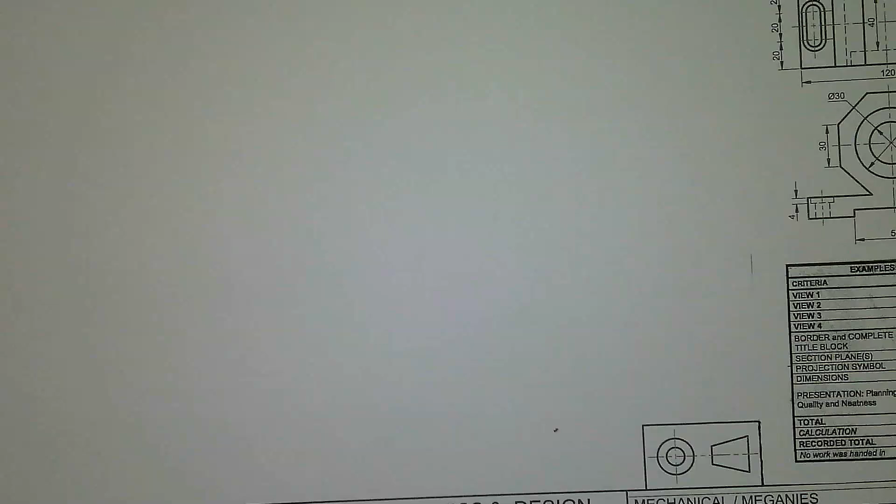Alright, great then. So today I'm going to take a look at a mechanical drawing in preparation for the upcoming exams. Now, if we have a look at this specific drawing, we are given the following. They tell us that the figure shows a front view and a top view, and it's in third angle orthographic projection.

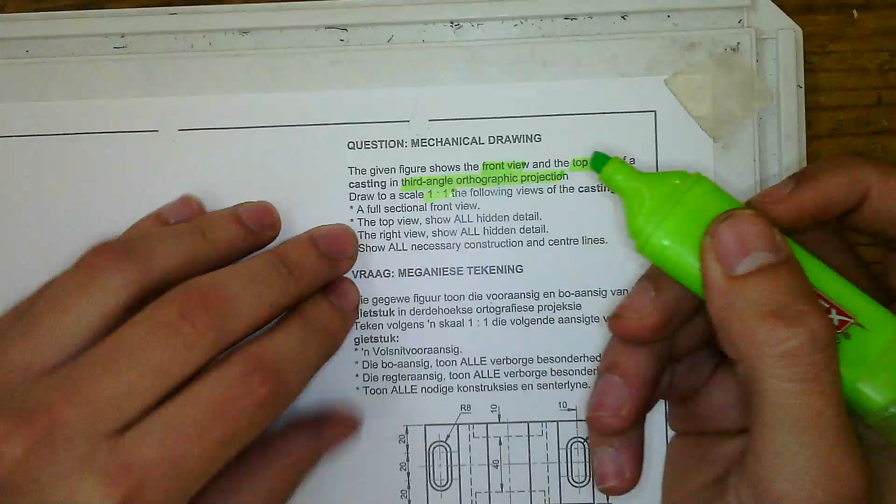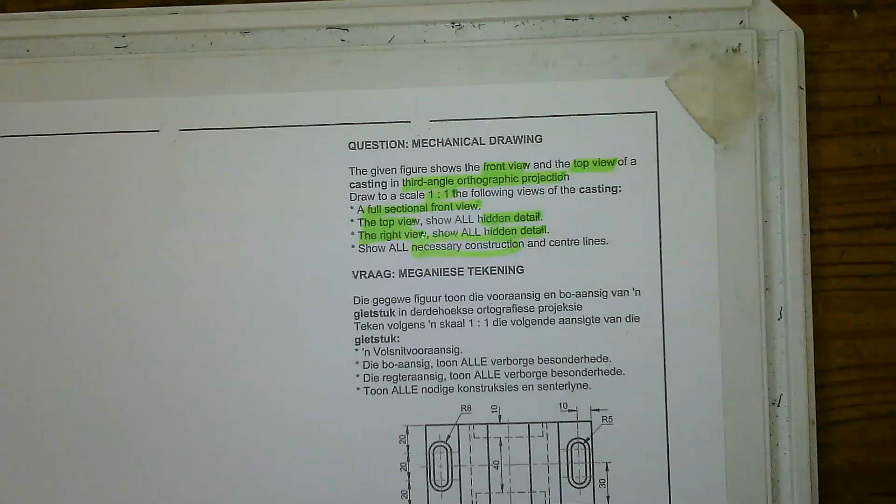And I want you to draw to the scale of 1 to 1 a full sectional front view, a top view with hidden detail, and a right view also with hidden detail. And you need to show all necessary construction and center lines. So if we look at the given views, the front view and the top view, we first need to figure out which one's which. And they told us that it's in third angle orthographic projection.

And in third angle orthographic projection, we know that the top view is always above the front view. So if the top view is above the front view in any third angle orthographic projection drawing, and they've given us a front view and a top view, then this has to be our top view and this has to be our front view.

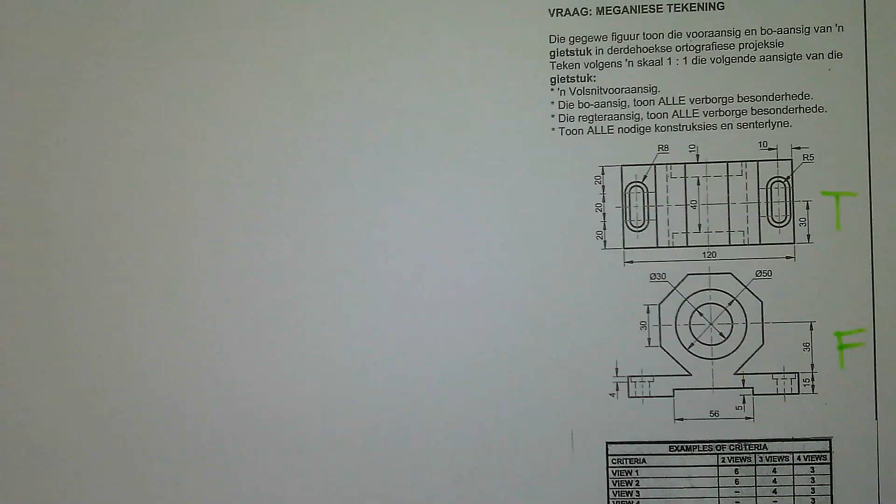Before we start drawing, I want you to please take note of the following. Before you take your pencil and just start drawing one of the views, you first need to calculate how much space you need for each drawing, since they have not given us a grid to work off. So if I look at these drawings, I can see that this one has a maximum width of 120 mils and a maximum length of 60.

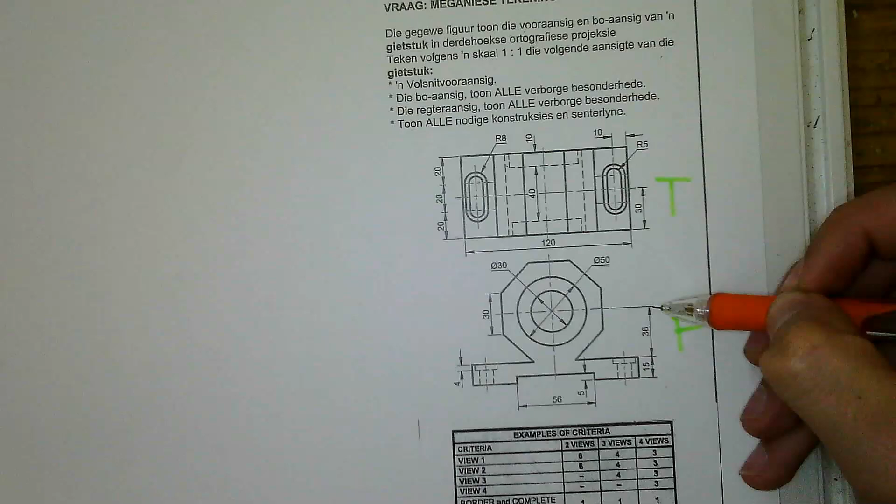And then for the front view, the distance from there to there is going to be the same as the distance from there to the top. So if I was to extend that line over, that distance will be the same. Since it's an octagon, we can assume that the total height here will be 15 plus 36 plus 36, which is 87. So from the bottom to the top is going to be 87.

So before I start drawing, I'm going to quickly measure a couple of things. From the left side of my page, I'm going to measure 120 to the middle, so it's there, and then I'm going to extend past it about 4 more mils, so I'm going to make a mark right there. And then I just need to have at least 60 open there to the top and 87 open to the bottom to leave enough space for everything. So this should be fine. And then I can draw in my grid.

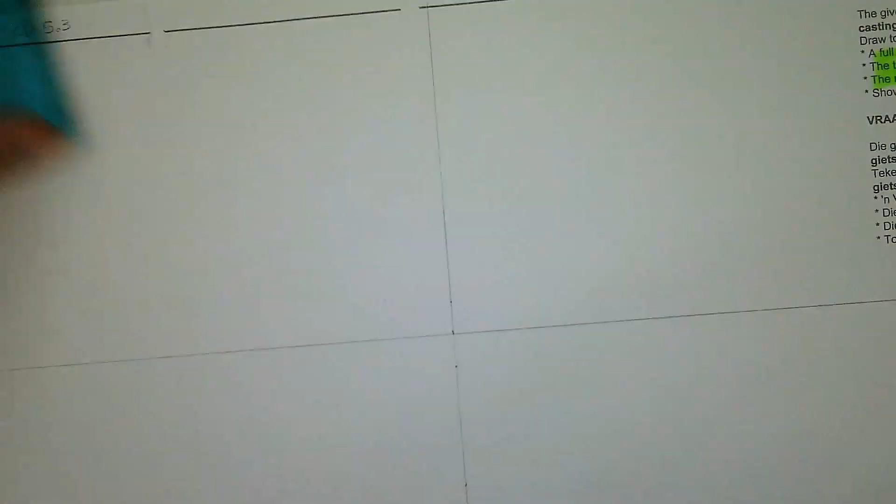Alright, now that I've drawn in my grid, I need to quickly create my guidelines that are going to help me to place everything nice and neat. So from the center, I'm going to measure 10 mil up, 10 mil down, and then also from the center, I'm going to measure 10 mil to the right and 10 mil to the left, and then I can just extend all of those lines like so. So I'm just drawing a line that goes through those points that I've just created.

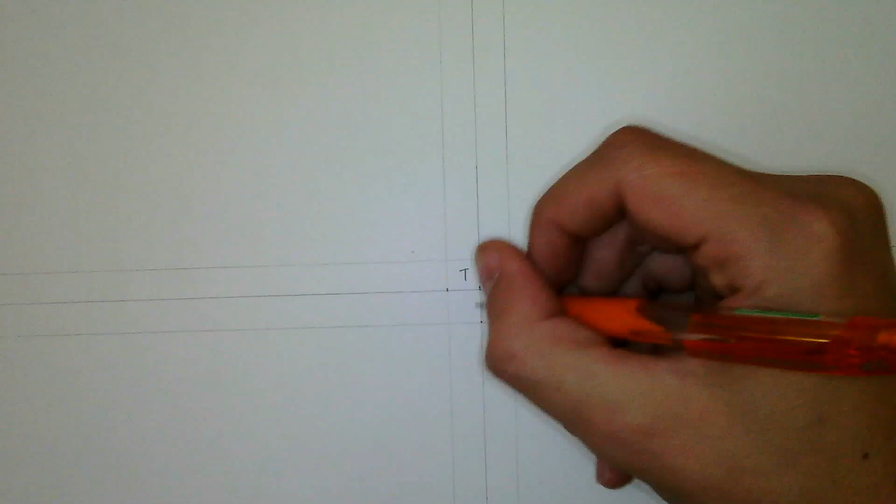Once I have my grid lines, now I can start looking at what I need to draw where. Remember, we are going to need to draw a top view, a front view, and a right view. So that's going to be the placement for my different views. So if I look at the drawing that is given to me, the first thing that I'm going to start with is my front view.

Now, I know that I have to draw a full sectional front view, but even with a full sectional front view, a couple of things will be true. In this case, if I cut my front view down the middle, in other words, if I go to my top view and I cut it there, so that I'm going to see the inside of my front view, I'm still going to see all of my outside lines. So I'm going to start with that.

So remember we said that the total height here was 87. So if I go to where my front view must be drawn, I'm going to take my ruler and measure 87. I'm going to put it there. Remember, I'm starting to draw on that corner right there, so I'm starting to measure right there. So I'm putting my set square there. Measure 1, 2, 3, 4, 5, 6, 7, 87 right there. So that's going to be the total height of this thing.

Then they tell us that we have a mark at 15 and a mark at 36. So what I'm going to do now is I'm going to go back to that dot right there, and I'm going to create another mark at 15, and then from that mark I'm going to create another one at 36. So 1, 2, 3, 36. And now I have all of my points for the different heights, and then we know that the total width of this thing is given as 120. So on this line I can just quickly measure 120.

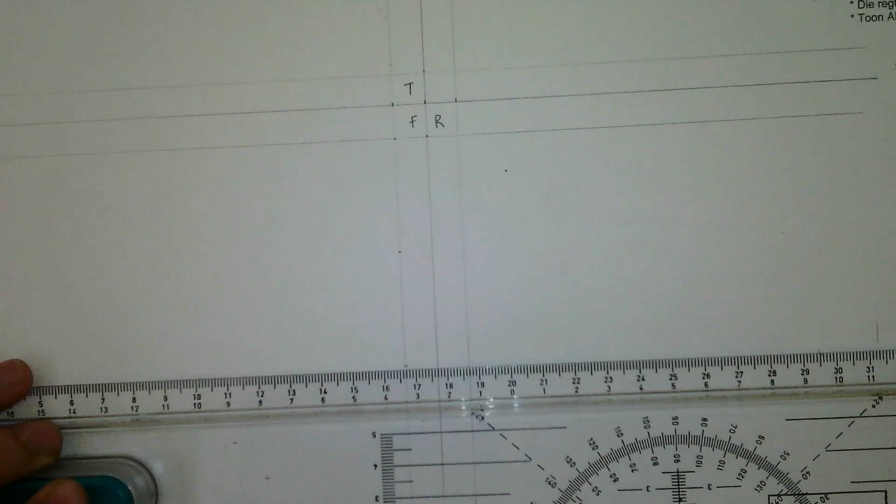So there's 120. And can you see why we had to measure the 120 at the beginning? Because now if you started to draw a little bit more to the left, you wouldn't have had enough space to draw the rest of your drawing. Then I'm also just going to quickly extend those points that I've created. So this one as well, I'm just going to extend them to my drawing surface. And I'm going to extend this one to the top as well.

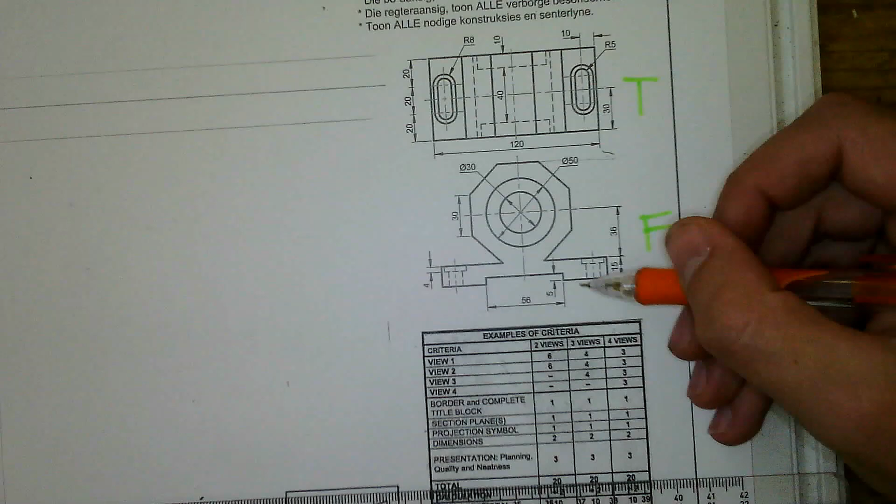Alright, so now that I have something to start working with, I can have a look at what I need to draw here. So we can see that there's some sort of cavity right there that runs underneath this casting. It starts in the center, and then the total width is 56. So from the center to that side is going to be 28, and from the center to that side is also going to be 28. So if I find the center here, which should be at 60 right there, I can measure 28 to the left and 28 to the right.

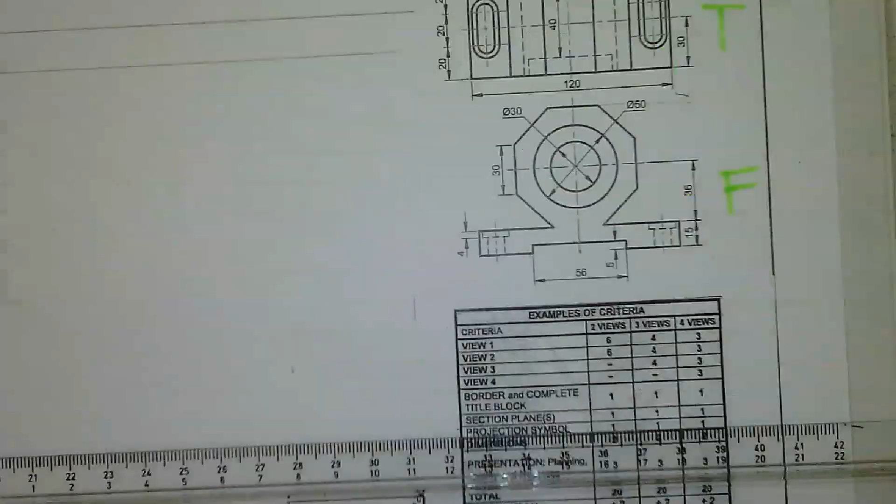And then they also tell us that that cavity right there has a height. Let me zoom in quickly so you can see what I'm talking about. The cavity right there, so from there to there, has a height of 5 millimeters. So if I zoom out again, I can go to one of these points and just draw a line up, measure that line to be 5, and now I've got the height of this cavity. So I can extend this one to the top as well, and then I can draw in this cavity. And I can also draw in these two sides.

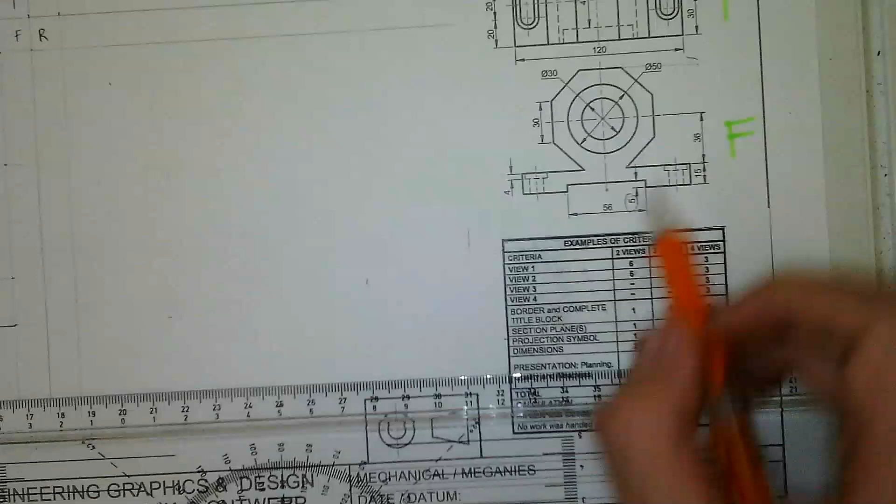Alright, so now that I have that, just add these two lines as well. Now that I have that, I can continue to the rest of, remember, I'm only drawing the outline of this entire thing. I'm not focusing on the hidden detail now. I'm just focusing on drawing the outline of everything. So we have got from there to there, and now from there I need to go 15 up. But remember, we have already drawn in that height line at 15, so I can just make those two dark lines. And then I'm also going to just extend my center, which is right there, all the way to the top, so that I have a center running through this entire thing.

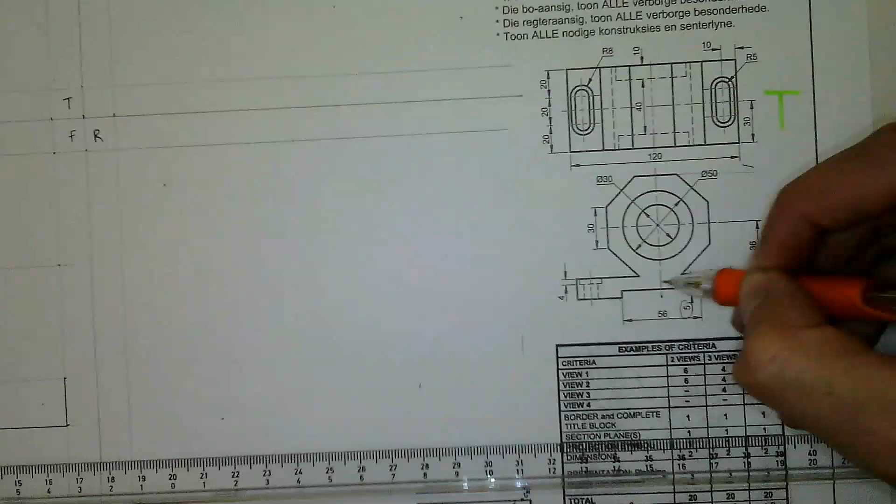Now if we look at what we have here, we have a center right there. Now that center corresponds to that center in my drawing. So since I have that center, I can start constructing this octagon and those inner circles. I'm going to start with the octagon because I need the octagon in order to know how far these lines go in. So if I go to the center, we know that the distance from there to there is 36. In other words, if I was to draw a circle around this thing, the radius of that circle will be 36. So I'm going to take my compass and set it to 36. And this is part of the construction of an octagon, which you also need to know. I'm going to take my compass, set it to 36, and draw a light circle right there.

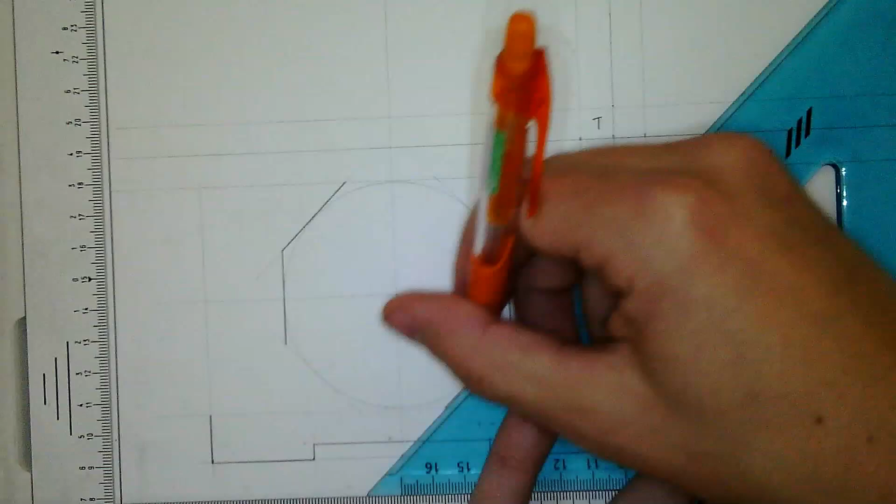And then if we go back into our memory and think about the construction of an octagon, you will remember that in order to construct the octagon, we had to draw tangent lines on this circle with our 45-degree set square. And that is how we constructed our octagon. So if you can see, I'm going to the tangent of the circle, lining my set square up, and then I'm drawing in the line so that it touches the tangent of that circle there. Now I've got this octagon. That line is a bit too far. This top one. Alright, so there is our octagon.

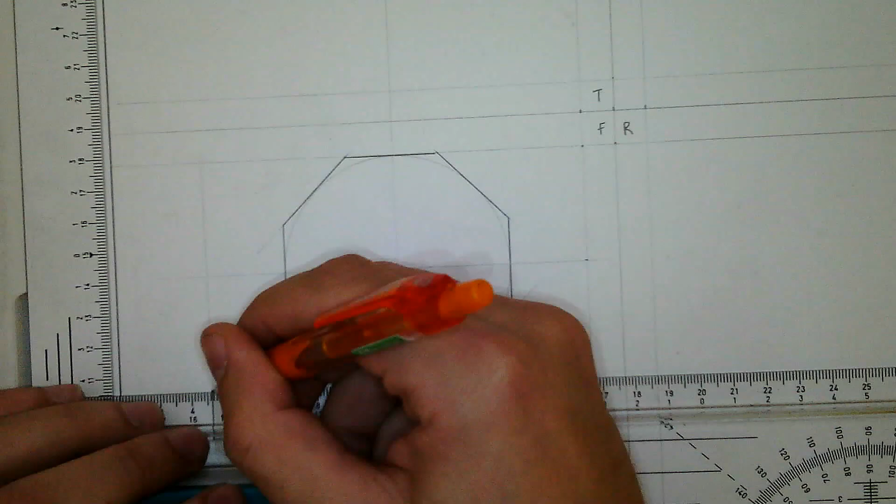And now I can see that those lines need to go to that corner right there, so I can draw them in with hard lines, A-type lines as well. And now I've got this basic outline of my front view. But remember, our front view has to be drawn in as a full sectional view. Okay, so I'm going to stop here with my front view for now. I'm going to continue on to my top view. And then once I've completed my top view, I'm going to go back to my front view in order to finish it. So the first thing that I'm going to do now is I'm quickly going to extend all of these different points of my octagon all the way to the top where my top view is going to be drawn in.

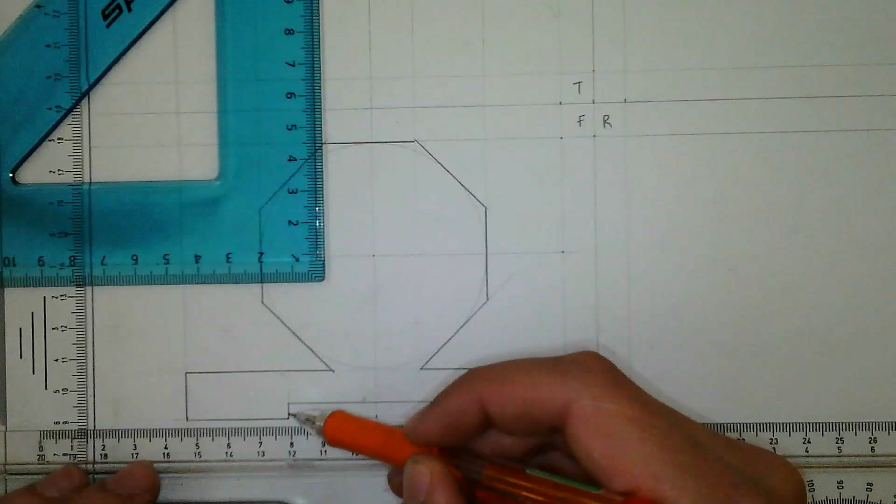And I'm also going to extend the sides of this casting to the top so that I have the parameters, and the center line I'm also going to extend to the top, and then also I'm going to extend the hidden detail lines for that cavity right there to the top as well. So I'm just going to make a mark there so I can extend them. Set square is a bit short.

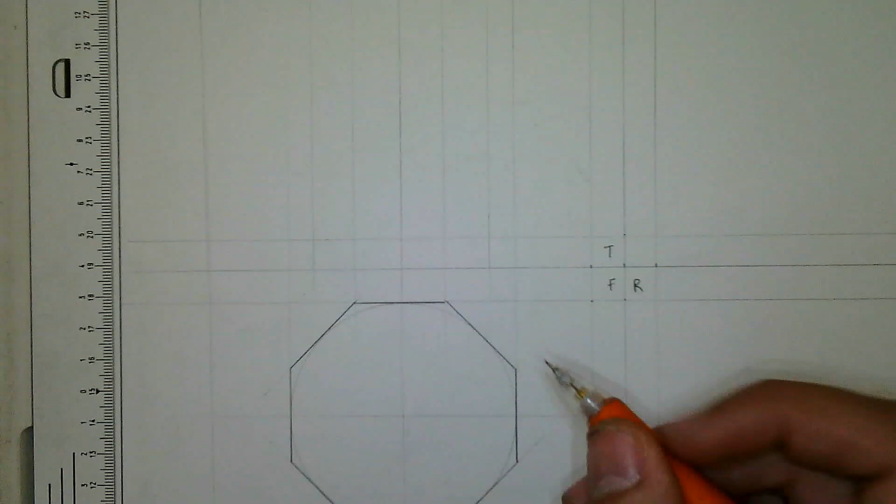Alright, so if I look at what I have right now, a couple of things are true. The distance from there to there is 120. Why? Because the distance from there to there was 120. So I already have that 120. What do I need now? I need to find that 60 from there to there, or from there to there. So again, starting in this corner right here, I'm going to measure 60 to the top. 1, 2, 3, 4, 5, 6. 60 is right there. And I'm going to extend this line all the way over, and I'm just drawing it in with a hard line because I know it's going to be there.

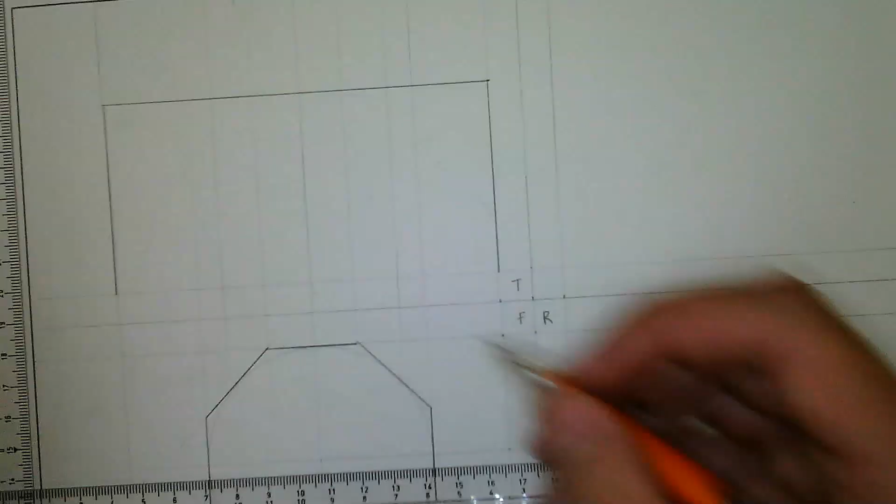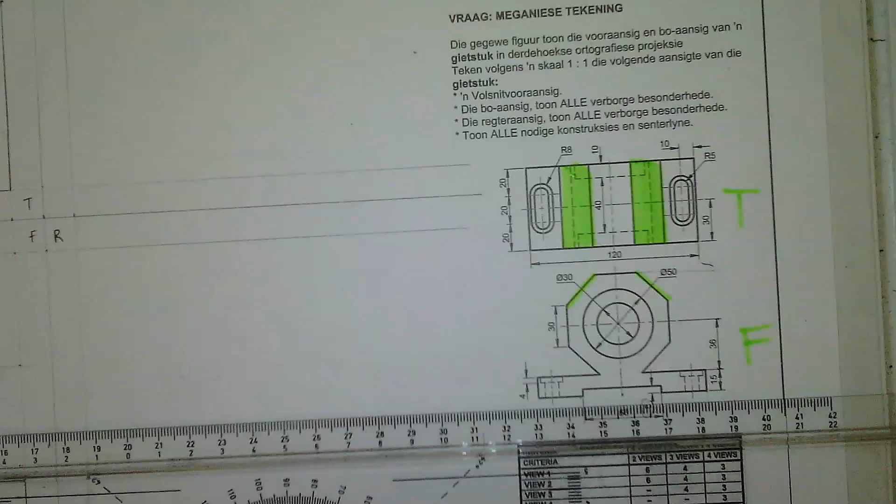If you look at the outline of our top view, you can see that it's a rectangle. So I'm going to draw in the rectangle of my top view, the basic outline of it with A-type lines so long. And then we can see, if we look at that facet right there and that facet right there, they will correspond to these sections in my top view. And if I have a look at this top facet right there, that's going to correspond with this section in my top view. So I can see that I have to transfer those corners over as these lines, that corner over as this line. Same for all of them.

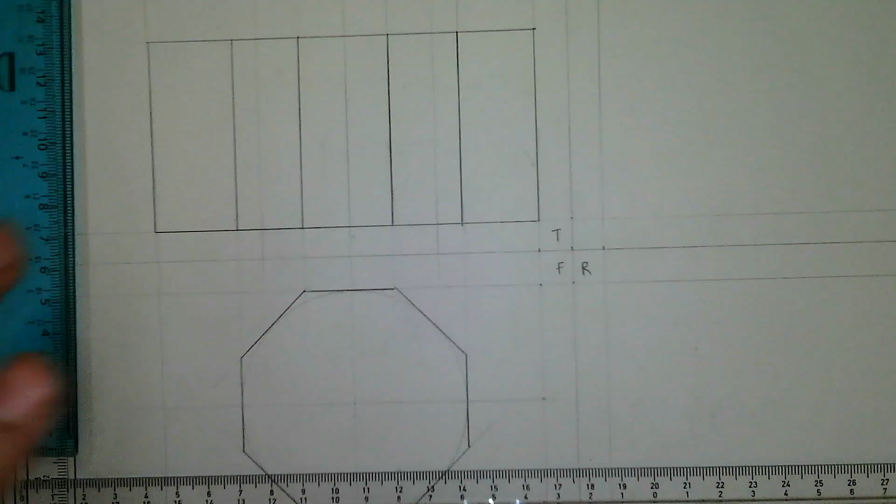So I can go back to this drawing, follow that corner to my top view, and then I can draw this in with a dark line. The same with this one. Same with this one. And the same with this one. Alright, so now I have those facets that I'm going to see if I look at my casting from the top. I'm going to see these sides of my octagon.

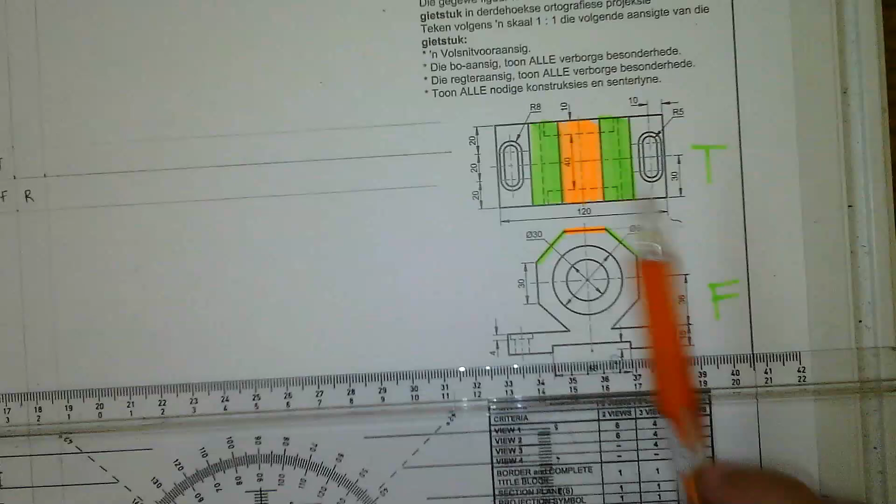If we have a look at this figure quickly, I just want to make sure that you are aware of something. This casting is hollow on the inside. So in other words, if I was to take my pencil and push it through this circle like that, I would be able to push it all the way through. In other words, if I was to take it and push it through that circle in my front view, I would be able to push it all the way through. There's nothing there. Okay, it's hollow in that section. So just keep that in mind when we move on to our section.

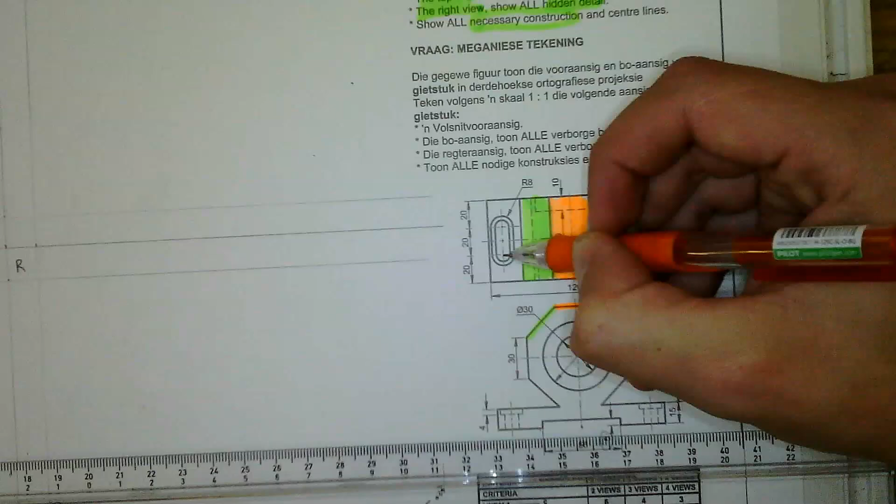Now I'm going to continue on and draw those semicircles, the cavity, bolt part, whatever you want to call it. I'm going to draw in that quickly. So the first thing I need to do is I need to calculate the center of that line. So we know that the total length of this line was 60, so the center will be at 30, right there. And then I can go and quickly look at this side. So from that center to that center is going to be 20. So from the center to there is going to be 10, and from the center to that center point is going to be 10 as well.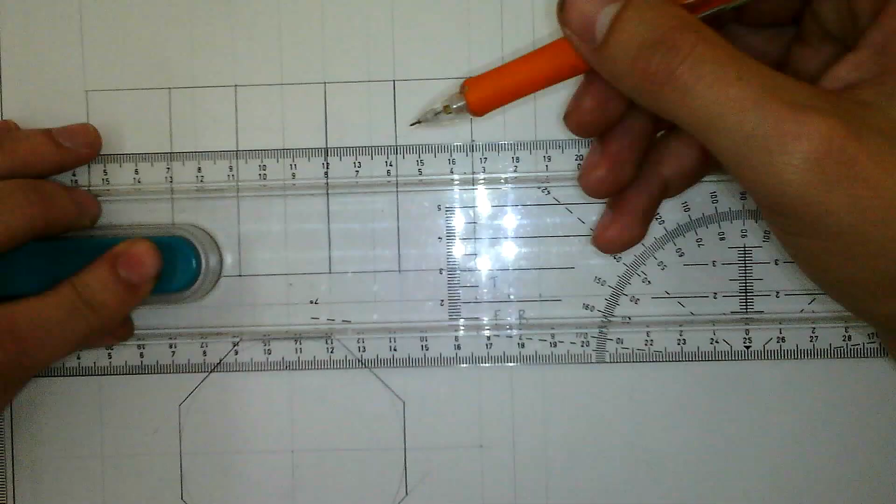So I'm going to quickly go to this mark that I've just created and measure 10 up and measure 10 down, and then I can transfer those lines straight through my drawing, project them through my drawing so that I can have them on both sides right there as well. And then if we look at the distance from the side to where our center line is, it's given as 10. So again, I need to go to my drawing, go to that top corner, measure 10 in, same on this side, go to the top corner, measure 10 inwards, and then I can transfer those points down as well using light construction line.

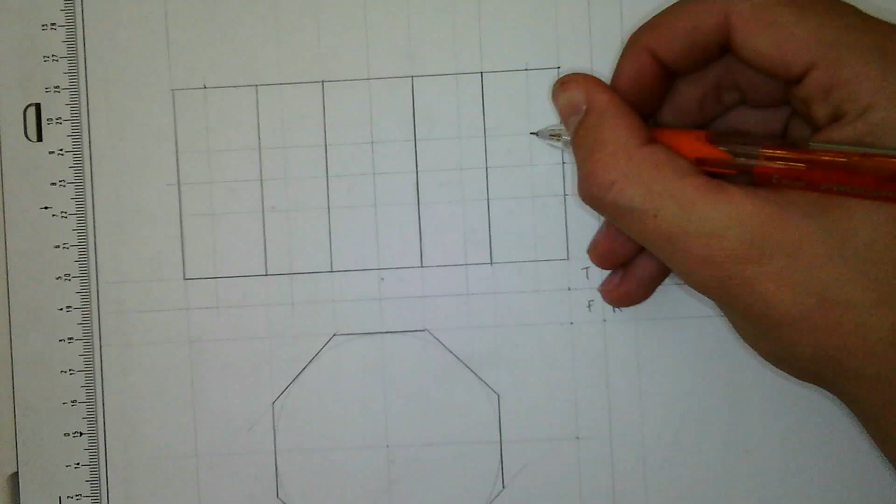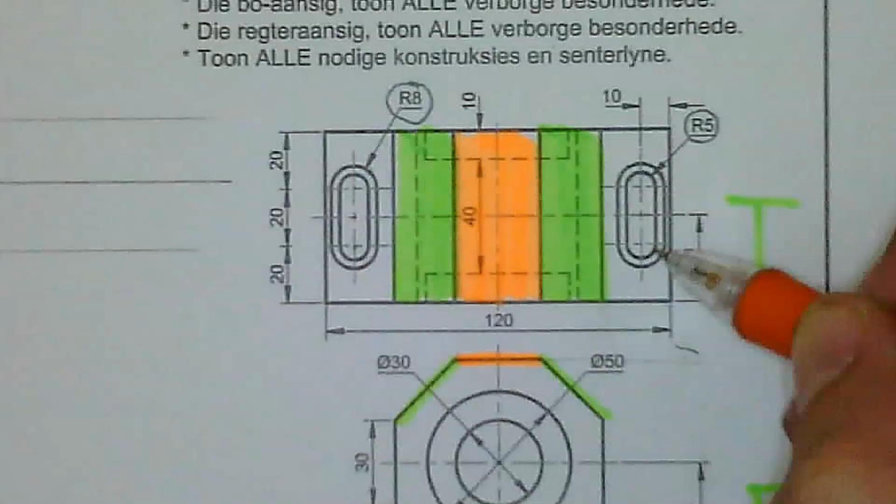So now I've got a center point there, a center point there, center point there, and a center point right there. And then they tell us that the radius for that small inner circle, let me zoom in again, the radius for that small inner circle is 5, and the radius for that larger outer circle will be 8, and I can assume that that's going to be the same for these ones as well, and all of those small circles, so I can just use those measurements.

So if I go back to my drawing, you can set your compass to 5. I'm just going to use a stencil. I'm going to go to that center point right there. Radius 5, so it's going to be diameter 10. And then I'm going to draw in all of my semicircles quickly. I see that's already a mistake. Okay, just be vigilant. If you make a mistake, no problem. Just make sure that you see it and that you correct it.

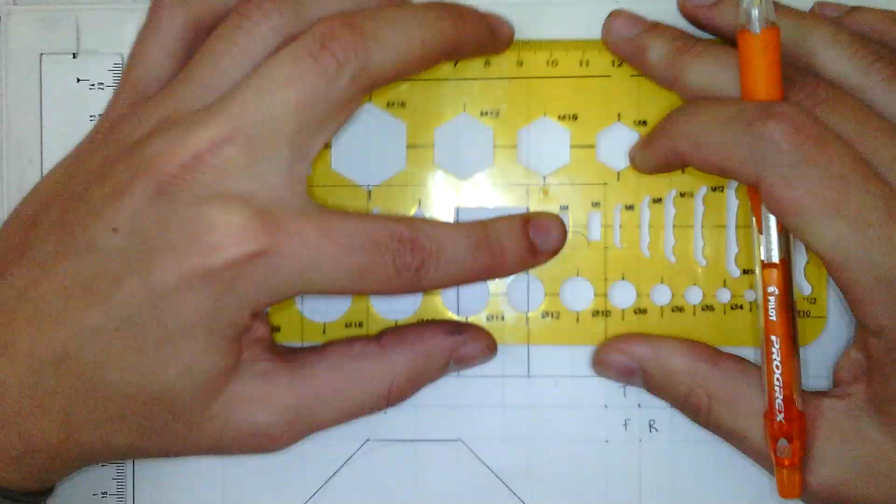And then we know that the radius for the outer one is given as 8, which will be a diameter of 16. So I'm going to go back, just draw in the outer circle as well. And again, you can do this with your compass. I'm just doing this for the sake of saving time. So if you have a stencil, you can do this as well. Just make sure that you still add your center lines at the end of your drawing, and then we can just connect those parts.

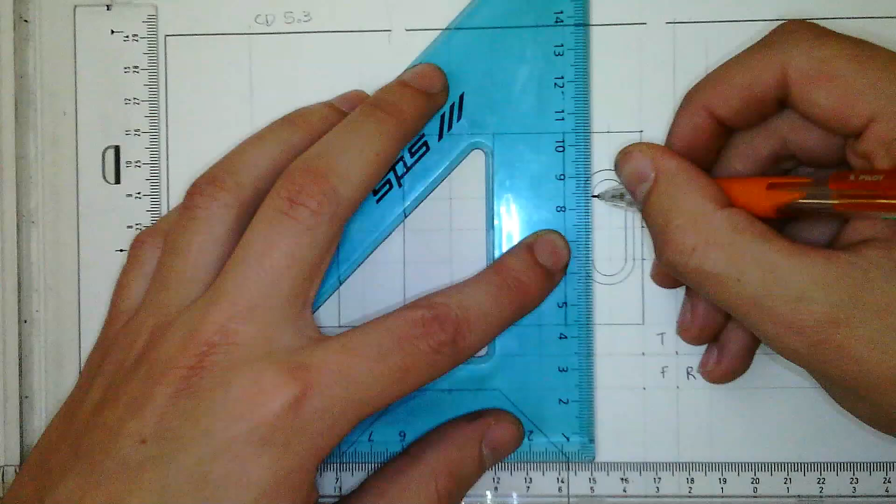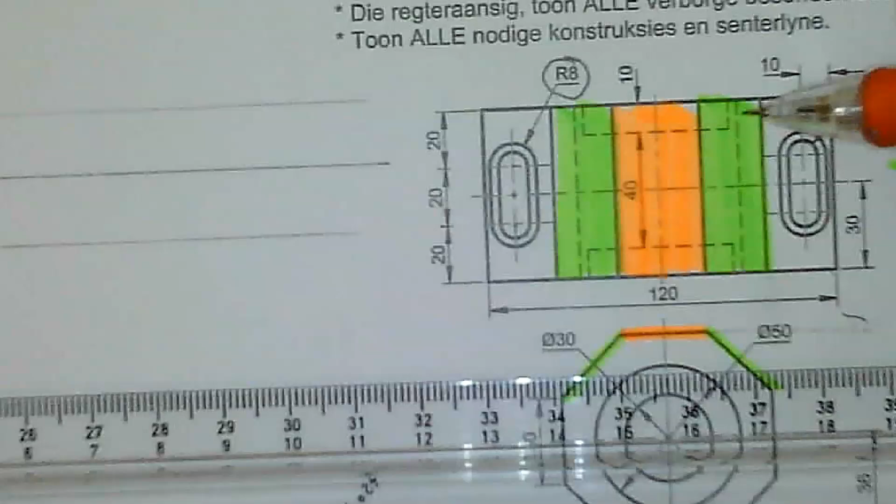Alright, so there are those two things. And then to complete our top view, we just need to add our hidden detail lines. The hidden detail lines are all of these dotted lines running along the top view. So what do they mean? Well, I'm gonna share a tip with you. If you take your set square and you line it up, you can see that dotted line right there. Just focus here quickly. That dotted line running down there lines up perfectly.

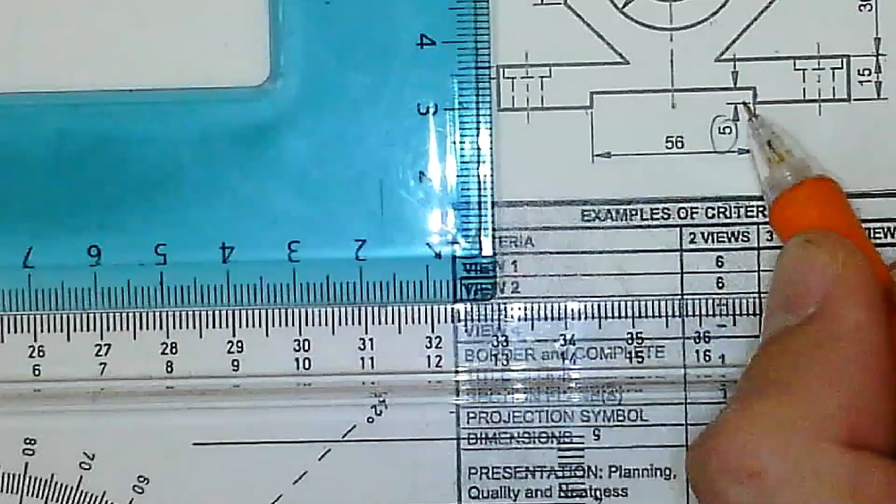Right? It lines up perfectly with that cavity at the bottom. So that cavity at the bottom right there, if I line my set square up with that cavity, you can see that it follows that dotted line. In other words, that dotted line right there and that dotted line right there indicates that that cavity, that hollow section, runs all the way through my drawing.

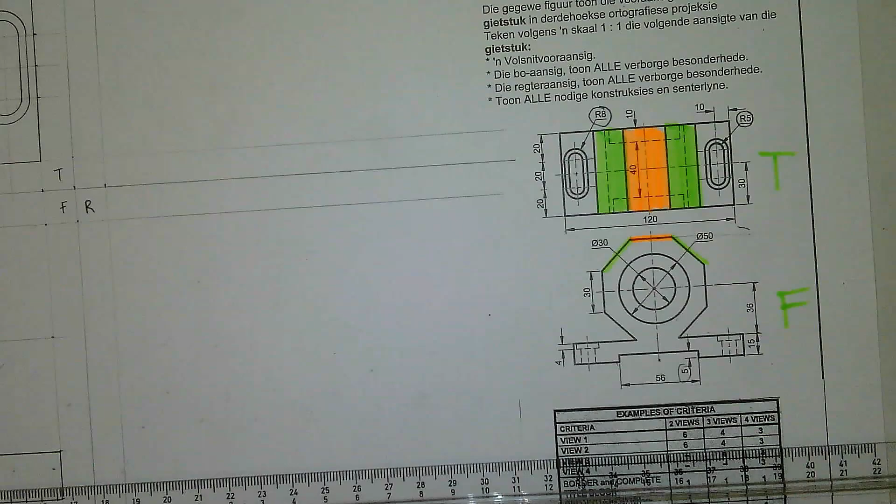So if I go back to my top view, you can just line up your set square with that hollow section in your front view, and then you can draw in these hidden detail lines. Remember, dotted lines. Then if you go back to our top view, we can see that this section right there lines up perfectly with this larger outer circle.

You see that? If I line my set square up with this outer circle, it lines up with that section right there. In other words, those hidden detail lines indicate to me that this larger circle of the two only protrudes into this octagon a total length of what looks like 10 millimeters. So from there to there is going to be 10 millimeters. So I go back to my drawing.

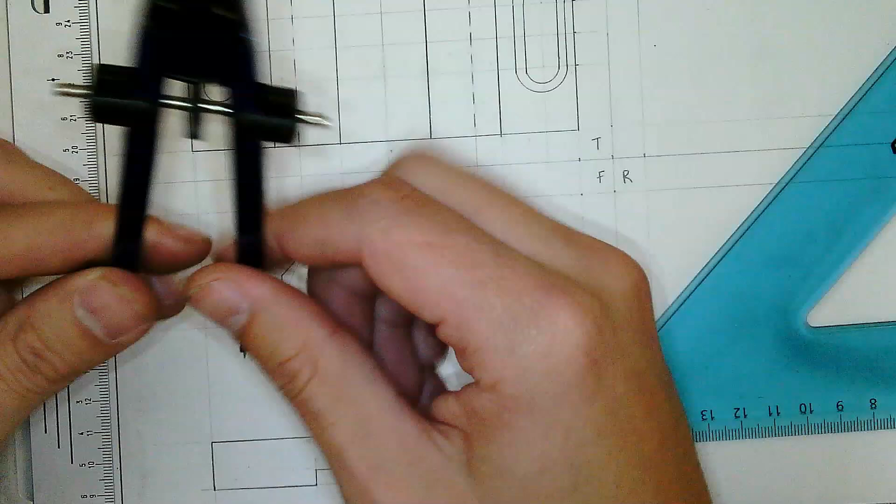I'm just going to draw in those two circles quickly so that we have them, and I'm just going to draw them in very light. We have one with a diameter of 50, so the radius is going to be 25. Set my compass to 25. Just draw a light line right there. And then the inner one has a diameter of 30, so a radius of 15. Again, just a light line. I'm just drawing this in so that I can project them over to the top.

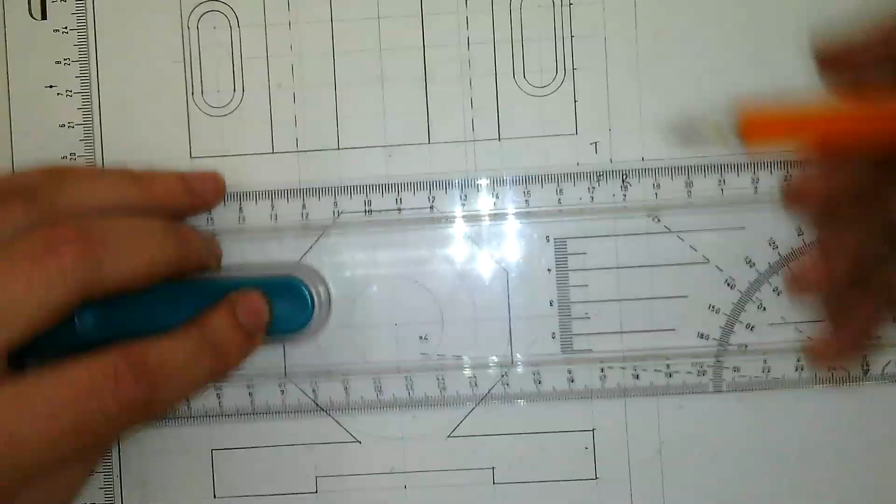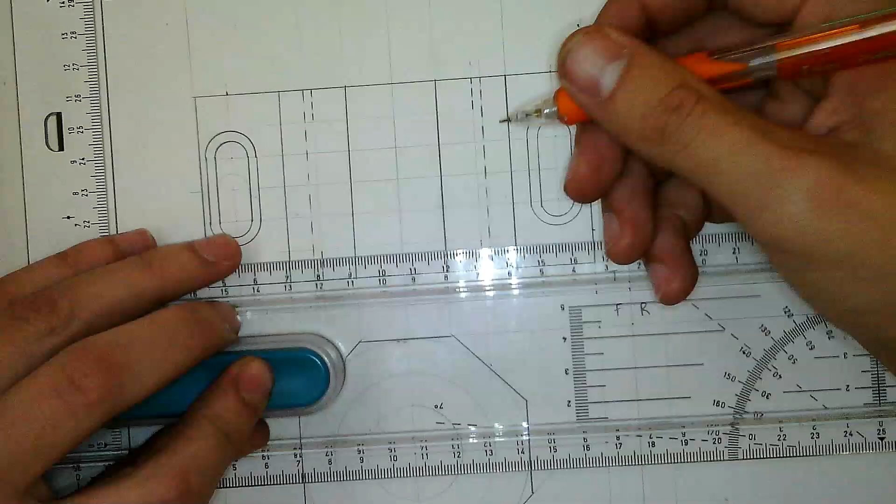Okay, and remember what we said? It only goes in 10, so I can measure from that corner 10, and from there 10 as well. Transfer those lines over. And now I can draw in the hidden detail line for this larger circle. So if I follow that projection line, it's going to go to there. So I'm going to line my ruler up there. Again, dotted lines, same on this side. Dotted lines, same for this one. It's at the top and at the bottom of the drawing, and then goes across on that 10 mark that we've just created. Okay, that was a bit too far.

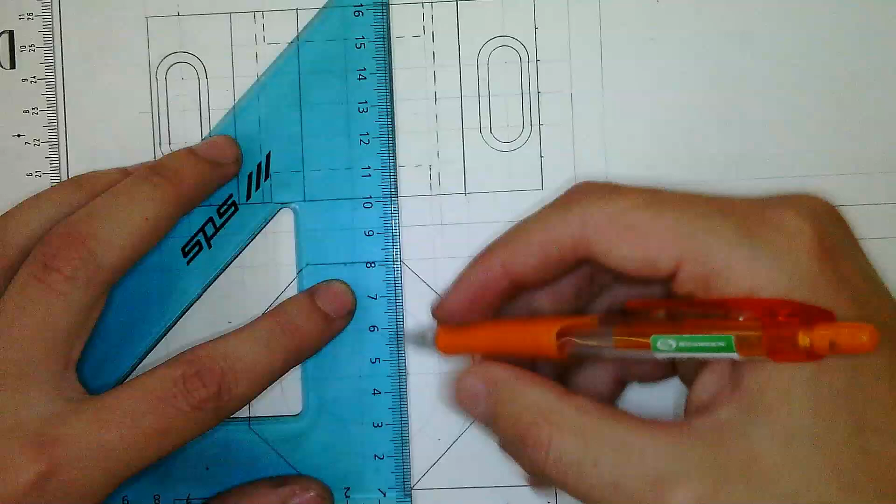Okay, and then there's one more hidden detail part that you should be aware of. Remember there's nothing in that circle. I can take my pencil and push it all the way through this casting and it's going to go through. It's hollow then. So if I line up my set square with that part of the circle and I project it to the top, you can see that it's going to line up essentially perfectly with this line. Same on this side, it's going to line up perfectly with that line right there.

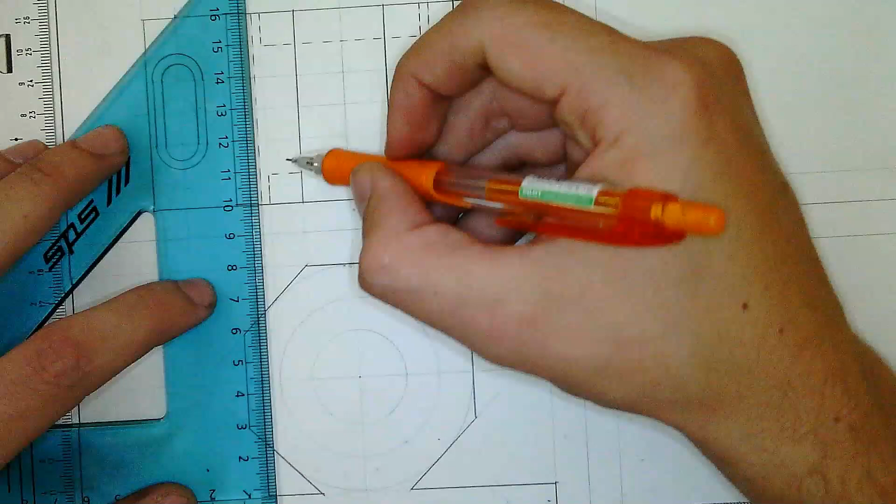That means that I don't really have to draw in any hidden details. Can you see I'm lining it up with a circle, but it lines up perfectly with that hard line. So I'm not going to be able to see the hidden detail, but in my head I need to know that there are hidden detail lines running across from there to there, so that I know that this thing is hollow on the inside, and theoretically, I am able to stick something right through it. Okay, so you need to be aware of that.

Now that we are finished with the top view, we can continue on to drawing our section plane. So for the section plane, we are going to go to the center line of this thing, and we are going to draw in a cutting plane AA.

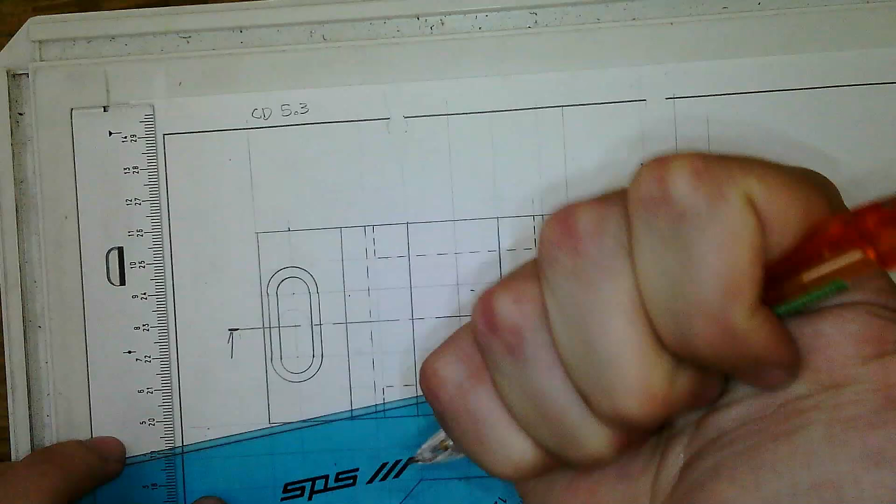Like so. Just make the edges a little bit darker, and then we add our arrows. Arrows indicating A and A. So that's just to show that we are looking in this direction when we cut it. And then that's our section plane.

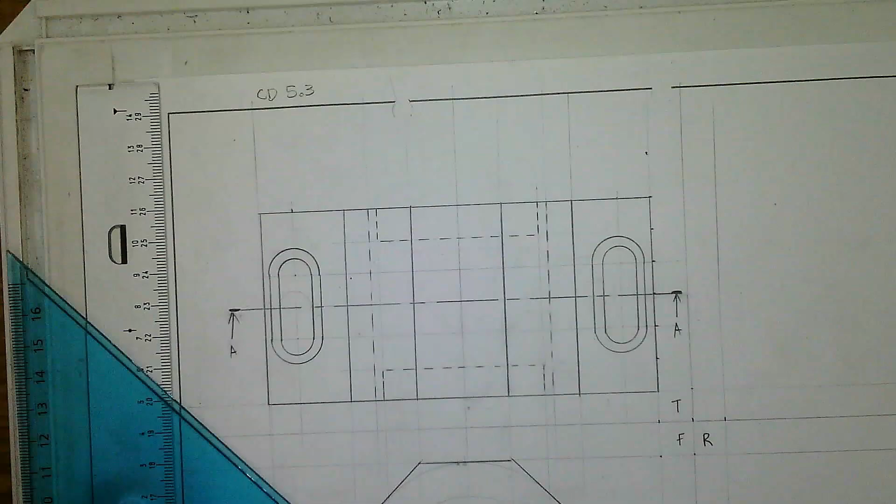If we look at the section plane, what does a section plane mean? It means we take a saw and we cut this thing on that line. We cut it straight down the middle so that we are able to see the inside of it when we look at our front view. That is what that section plane means.

Okay, so if we look at this thing, first thing I want you to notice is that there is a hollow part right there. So there's hidden detail lines right there, and we can see that this section plane runs through it. So if we look at where it's going to be hatched, the hatching is going to be from there to there. Then it's going to stop because there's nothing being cut right there. Then it's going to go, go, go.

And remember, there's a hollow section right there. So our octagon, again, will not be hatched in the center on that small inner circle. It's not going to be hatched there because there's nothing to cut there. And then we're going to have hatching all the way through here. Then the hatching is going to stop there again because we have a hollow section there. And then the hatching is going to continue on that last little bit of this drawing.

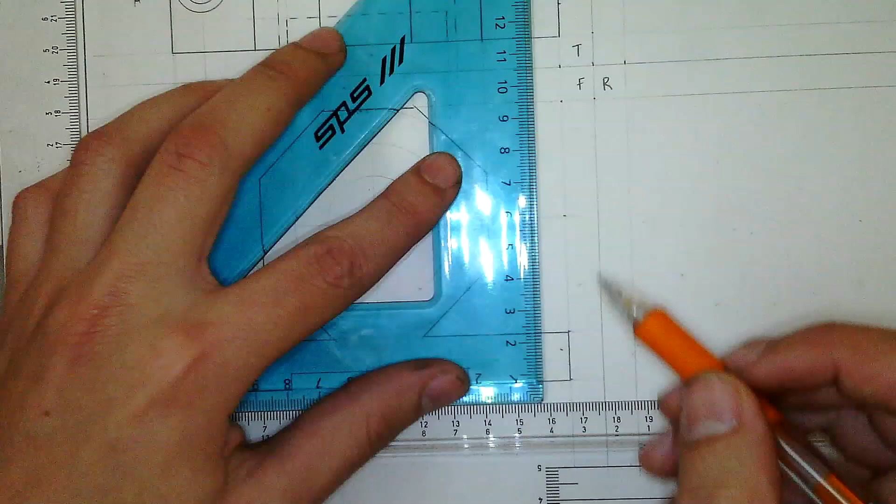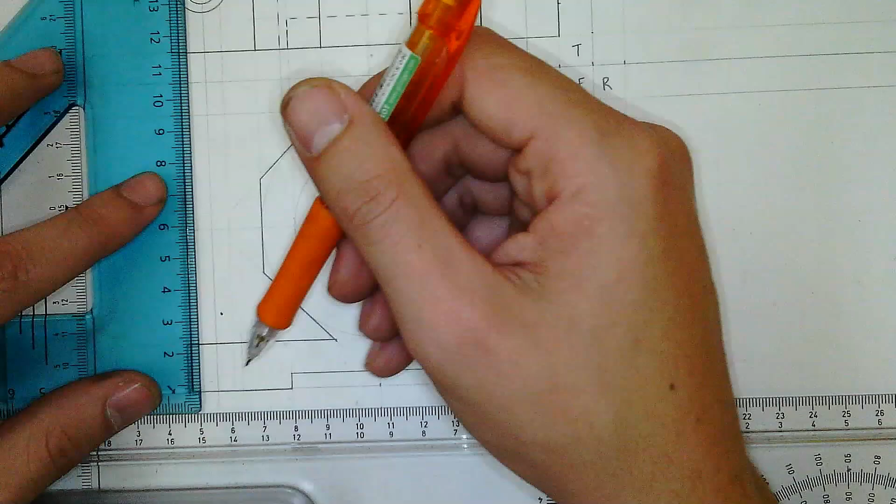So the first thing that I'm going to do is I'm just going to draw in those sections at the bottom quickly so that I know where to stop my hatching, so that I know where those cavities are. So all I'm doing right now is I'm just projecting down those lines to my front view. You'll see why in a second.

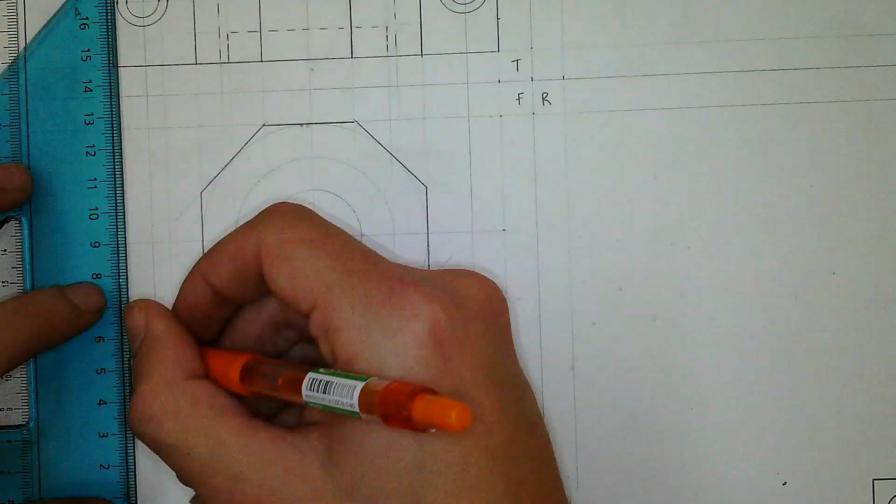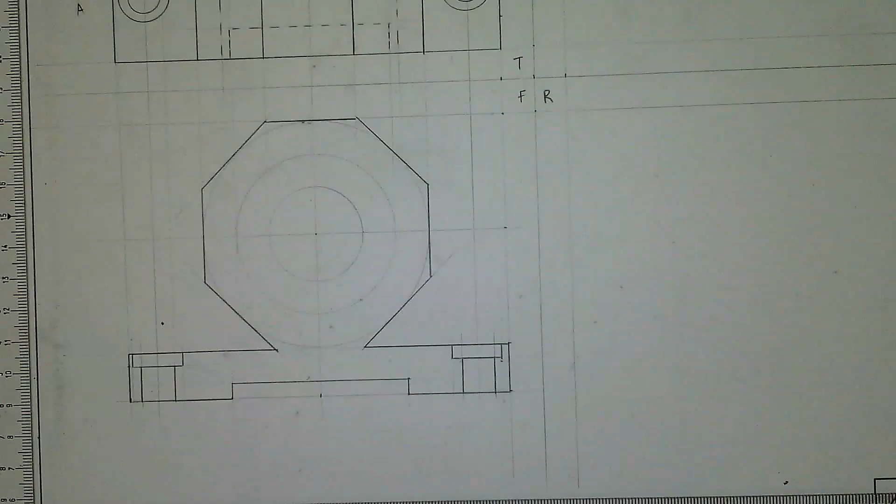This is going to allow me to quickly draw in these sections where a bolt or something is going to keep the base of this casting steady against some surface. Okay, now that I have that added into my front view, I can continue on to the hatching. Now, I want you to pay attention to the way that I hatch and where I hatch and where I do not hatch, because that plays quite a pivotal part in understanding this drawing.

Why did I not hatch right there? Why does my hatching stop there? Well, because it's hollow right there. Remember, when I cut through this thing right there, there's nothing that I'm cutting through right there. It's a hollow part of the casting. So there's nothing to hatch. I only hatch the parts that I'm cutting through. So again, hatching continues here.

Again, pay attention to the technique that I use when hatching. Can you see that I'm drawing one line? Then I'm moving my set square until that line on my set square lines up with my previous hatched line. Can you see that?

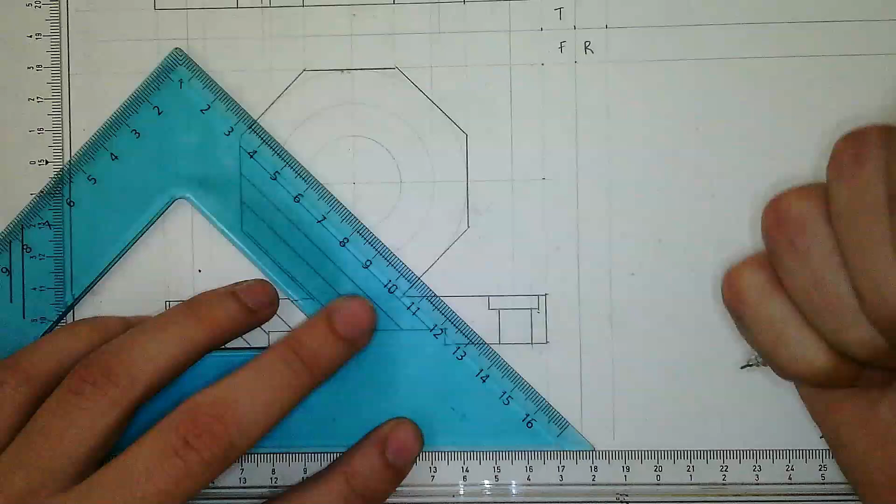Okay, this is where I want you to again pay attention. Look at where my hatching stops. Can you see it stops on that small circle? Why does it stop there? Because again, it's hollow. That octagon has a hollow inside. You can stick a pipe through it. So there's nothing to hatch right there.

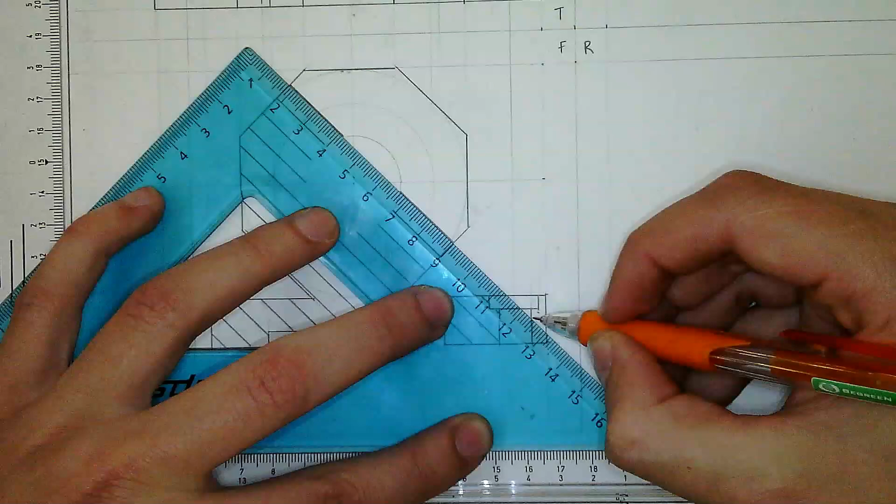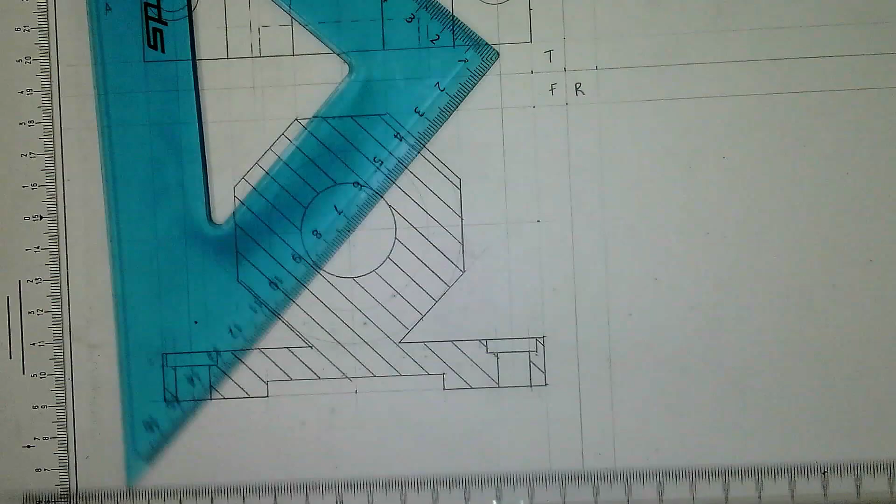Right? That one messed up. And then I can just make this inner circle a little bit darker. And just like that, I have my complete full sectional front view. And then I want you to please remember to always add your center lines. I'm not going to add all of them right now, but in all of these circles, you have center lines, which you need to remember. Otherwise, you will lose marks for them.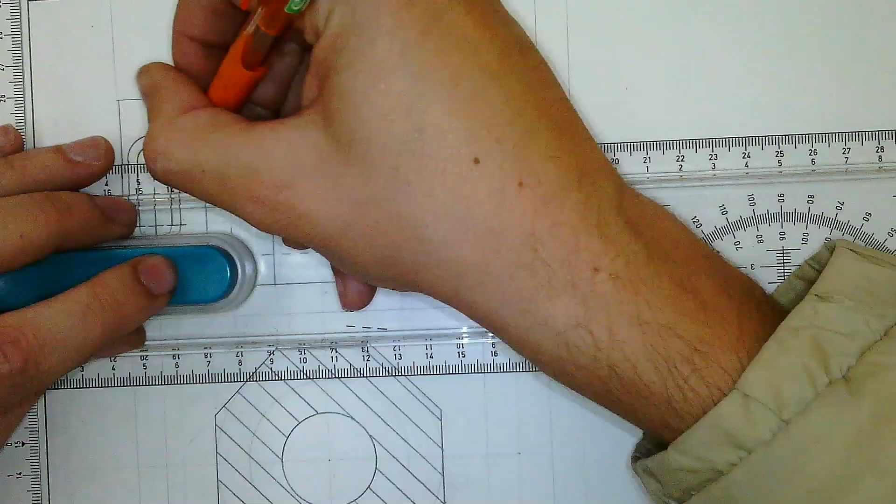Okay. So please remember to draw in these center lines. I'm just going to add a couple of them now for the sake of saving some time. But you should have a center line right there, and also you should have a center line running straight down the middle over here. Why? Because we have a cylindrical shape in the center of that drawing. And then you also obviously are going to have a center line there, and you're going to have center lines there as well.

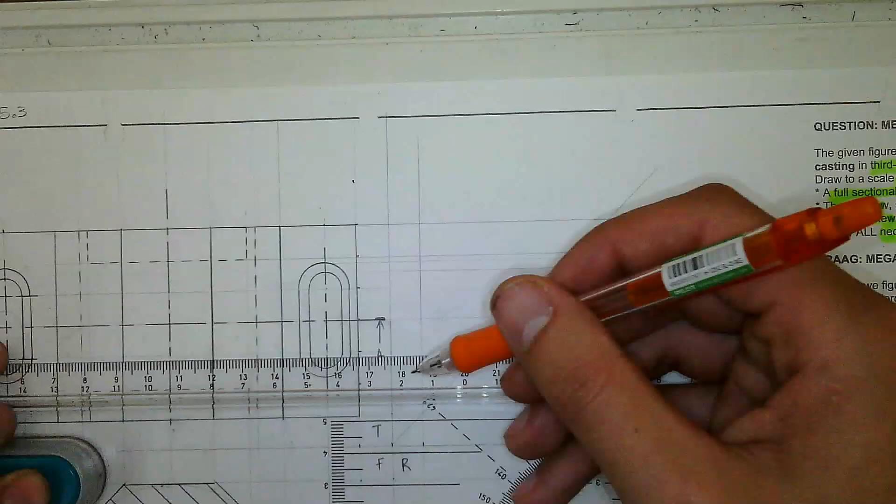Now I want to quickly move on to my right view. First thing we need is a 45-degree line right there. And then we can project over all of these different heights, all of these different points. Even my center line, I'm going to take that over as well.

All of those points I'm taking over to my 45-degree line so that I can project them down to where my front view needs to be drawn. Sorry, my right view. Okay, so since I have them all touching my 45-degree line, now I can go and quickly project them down to where my right view will be.

All of those point lines transferred over to that side. Now I can also transfer over the different points from my front view. You see, I'm taking all of these points over to where my right view will be drawn. It's going to make my life a lot easier when I get there eventually.

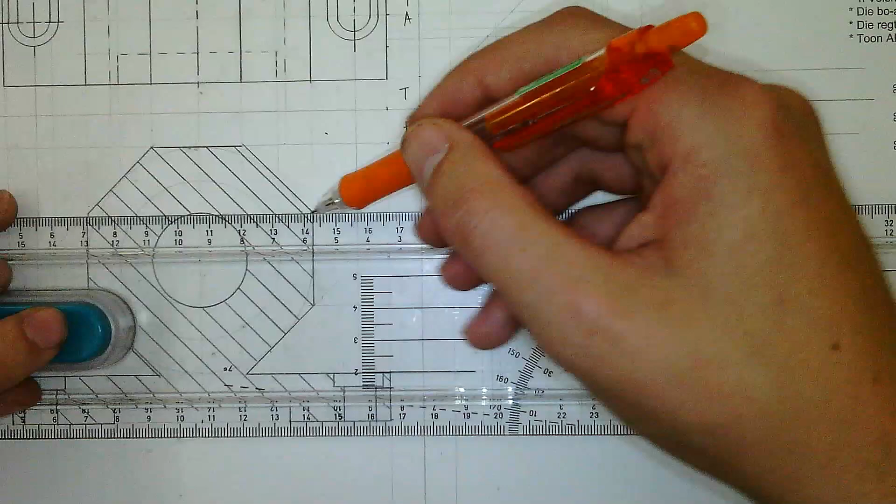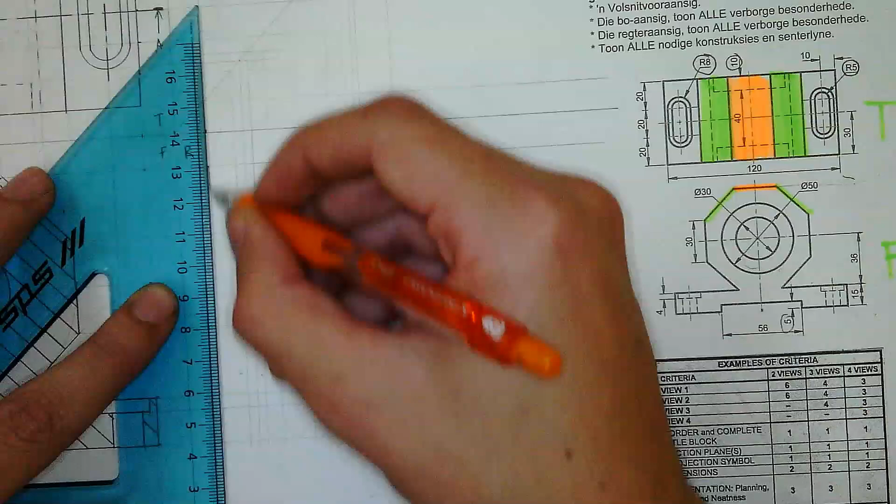Okay, now we know that if we look at this thing from the right side, the first thing that I'm going to see is the outline of it, which is just going to be a rectangle. I'm going to see the outline 100%. So I can draw the entire outline of this thing. Remember, we start drawing in that corner. Entire outline.

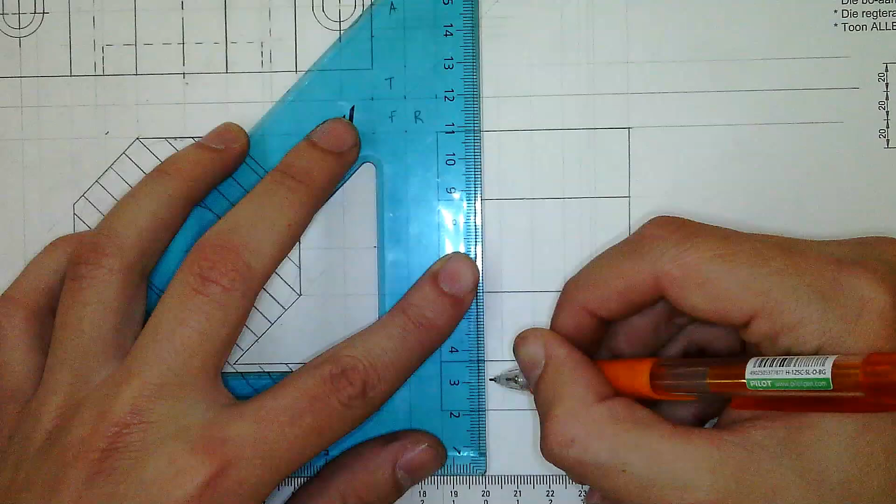Now, what else am I 100% going to see if I look at this thing from the right side? I'm going to see the corners of my octagon right there. Okay, so I can transfer those corners over as well. Okay, now what else am I going to see? Well, if I look at this thing from the right side, I'm going to see some hidden detail there where these cavities are. Okay, so if I follow those lines down from where my top view has been drawn, I can see they will look like this.

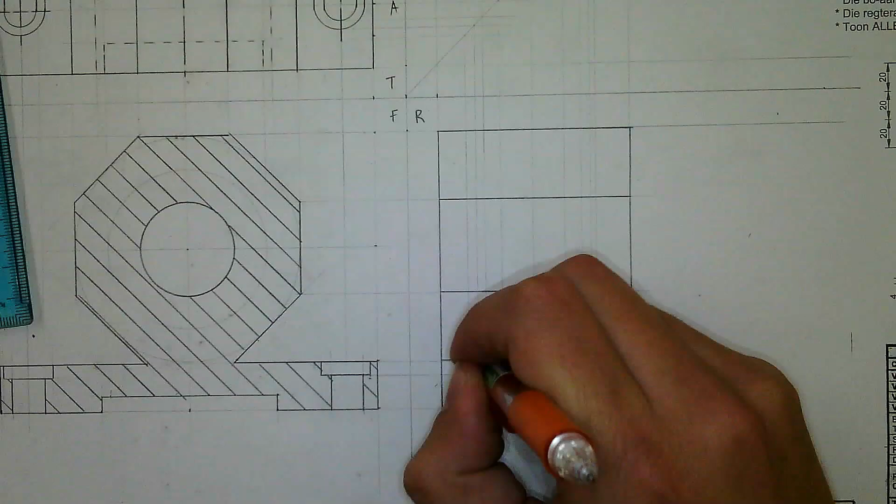Okay. Oh, sorry, that's not dark lines. These are dotted lines. Why are they dotted lines? Because it's hidden detail. Okay, I can't see them when I look at the right view, but I know that they are there, so I need to draw them in as hidden detail lines as instructed in the question. Okay, so I draw them in with dotted lines.

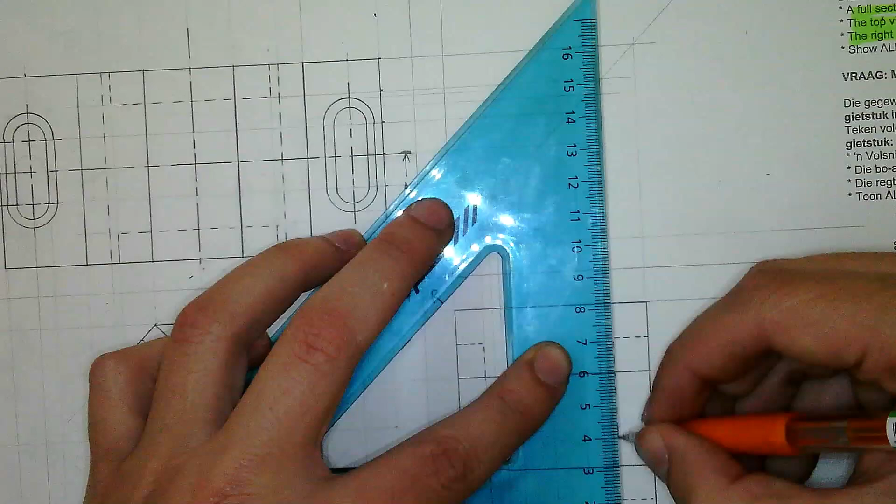What else am I going to see? Well, I'm going to see this larger outer circle, and again, it's going to be hidden detail. Why is it hidden detail? Because it's there, but I can't see it when I look at this thing from the right. It's on the inside. But since I know that it's there, I need to indicate that it's there by using hidden detail. So I draw it in with dotted lines. Okay, and this one's a little bit thicker and this one's a little bit thinner, but it's fine.

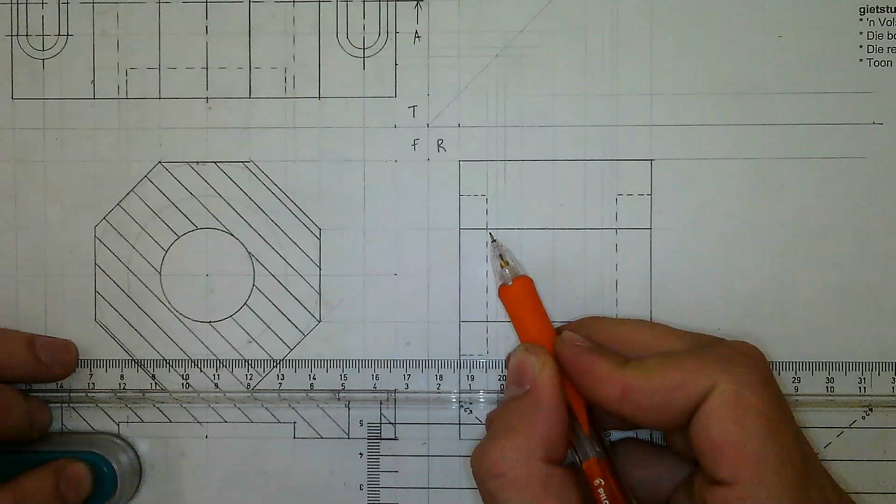Now, what else am I going to see as hidden detail? I'm going to see the dotted line for the top and bottom of this inner circle, which is going to be right there and there. But again, since they are in line with that hard line of the corner of my octagon, I can't draw in the dotted line, but I know that it's there. And then finally, we need to draw in the hidden detail for this cavity section, which we know runs straight through the base of this thing. So I can just draw in a dotted line running all the way through the base right there. And that is pretty much it.

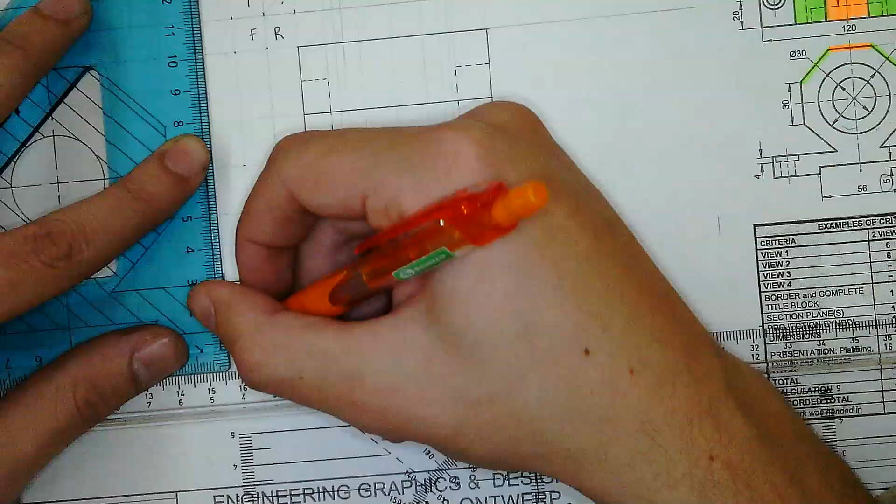Now, a couple of things I want you to remember. Again, just make sure that you add all of your center lines when you are finished. So go through your entire drawing. Make sure that all of your center lines have been added. Even here, we'll have a center line there as well, because it's a cylindrical shape there as well. Even here, right there as well. And then also you're going to have a center line running through this thing, through your right view.

Okay, so just go through your drawing, make sure that you add all of your center lines, make sure that everything that should be there is there, that every single question is answered. Make sure that you add your cutting plane. Very, very important. A lot of people forget to do this, and then you lose marks. You get marks for your cutting plane. So make sure that it's added and that it's done correctly.

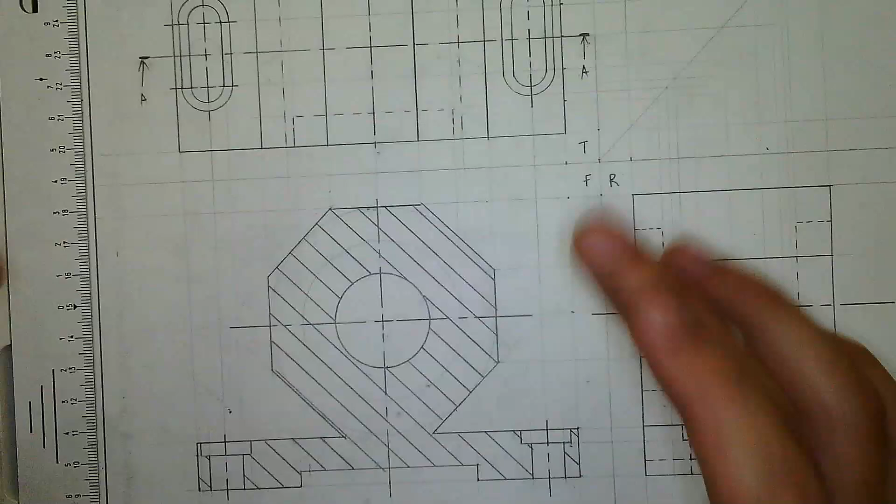When you are doing your hatching, I want you to please think about what this thing is going to look like when you cut it down that cutting plane. What is the inside going to look like? What am I going to see? What am I not going to see? What should be hatched and what should not be hatched? Keep all of these things in mind before you just start hatching. Because once you've hatched, it's going to be a lot of effort and a lot of time wasted if you need to start erasing things. So please make sure of those things, and then I hope this video helps you.